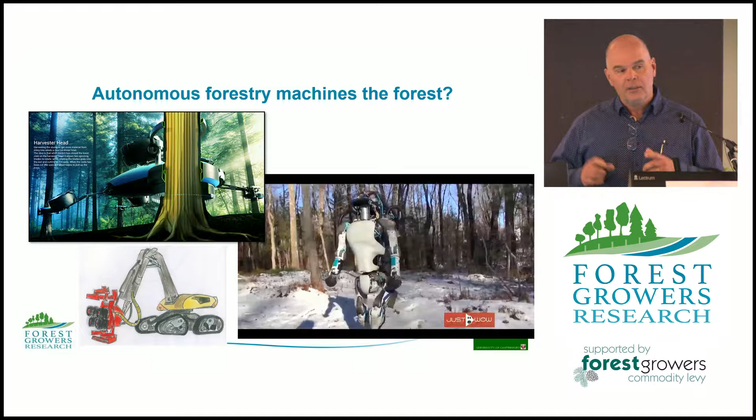You may have seen that video clip before, but why don't we have robots working in our forest industry? The forestry environment is a very difficult environment. Most robotic systems work in very managed, controlled environments such as factories. There's a lot of really cool drawings out there. You see that top left picture, a really futuristic looking harvesting machine, something that might float or drive through the forest, knocking trees over. The reality is there's a lot of low-hanging fruit out there in terms of autonomous machines, really cool ideas with robotics, but some of them are still some distance off.

Some of the examples that we do have in forestry already are semi-autonomous. Semi-autonomous refers to basically a computer controlling a whole aspect of an operation. The one I'm going to demonstrate here has been operating probably close to 15, 20 years now in Europe on their yarder systems: the whole carriage movement is being controlled by a computer, and that has some very specific advantages. First of all, the most obvious one, there's no operator, or the person who's looking after the yarder is available to do some other work.

One of the specific advantages of having a computer-controlled winch system here is that, for example, if a tree gets hung up behind a stump, we have these big spikes and tensions. It takes an operator about 1.5 to 2 seconds to respond to that. The computer can respond in 1/1000th of a second and actually stop it. We're tipping over about 1 yarder here in New Zealand every month. That's the stats on our yarder tip overs. So that's one of the ways that the technology can help us prevent these particular accidents from happening.

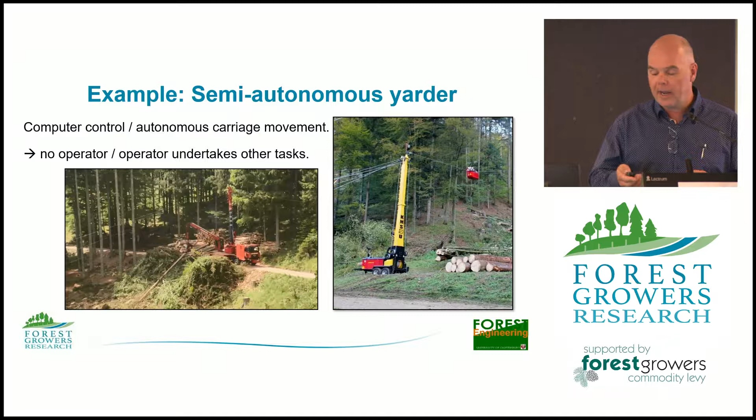The other thing that we'll see in this picture here is you can see the biomass issue highlighted by Kit in his presentation yesterday, and you can see here how some of the European systems are managing it as a separate product. They're able to store it and they will pick it up as part of their regular harvesting operation.

Here's another one that's getting a little bit closer to home. Obviously, a lot of our extraction is done by ground-based systems, our skidders and forwarders. Here is a specific system that's been designed for steep terrain. So we've got a winch assist harvester working on the slope. So that's actually being supported by a cable. And you've got this thing, and they actually call it a Pully, but it's a little buggy that simply shuttles itself up and down between the harvester and the roadside.

So it's an unmanned extraction system that's bumping up. The harvester loads it directly, then it shoots itself down and ends up at that roadside to be unloaded by an operator that then also turns around and loads the trucks.

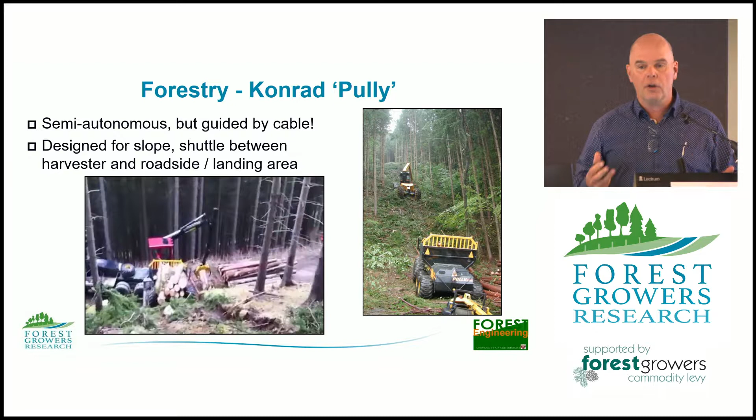So can we expand it? This one works on a rope, and the reason why it works on a rope is because in Europe it's not clearfell, they're working under canopy, so they're restricted in terms of the GPS signals that they can get, so they have to work along a rope. In New Zealand, of course, we're working in clearfell, so we can actually work more extensively with GPS.

We wouldn't be the first industry to really adopt sort of autonomous extraction systems. Both mining as well as farming are quite far advanced in adopting this technology. Here, for example, we've got a tractor drone. And it's very simple technology. It's simply your GPS unit on top, and then you may have some sensors or video cameras on the front to help for that final control.

In this case, they're harvesting grain or corn. But this machine here, this tractor here, is simply a drone. It's what they call a tractor drone. It doesn't have an operator, and it simply shuttles between the unloading area. You've got a GPS on the harvester, it knows where to go, it'll chase it down the paddock, and when it gets right next to it, it'll follow it along until it's full, and then it shoots back to the unloading area. So you can easily imagine that our skidders and forwarders would be able to do a very similar operation without an operator in it.

The exciting thing, and I should say some of this work was supported by the Forest and Wood Products Australia, and one of the reasons there is perhaps also for our manufacturing industry, is if you have a look at the tractor unit down below there, what do you see? There's no cab on it. There's really a lot of design opportunities that we can start to implement on our machines if we don't have to have a cab. The typical cab on a harvester or forwarder is $150,000. So if you build a machine without a cab, it's $150,000 cheaper. Okay, so straight away you have a real financial advantage.

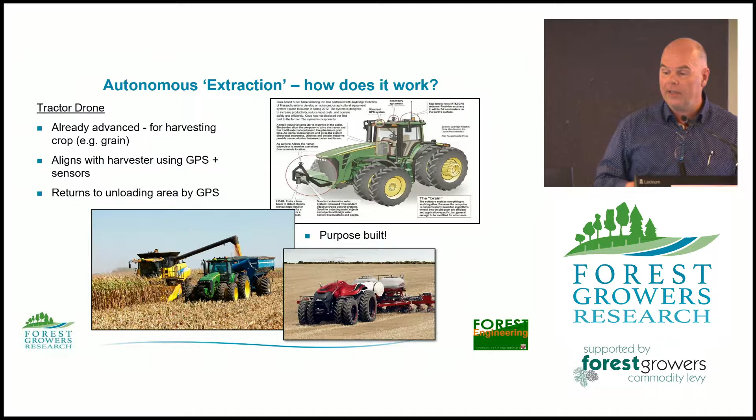We have got a little lead-off project which is co-funded by FGR as well as FWPA, and that's really starting to build a prototype. So I had a group of students here, and this is the prototype they've come up with. It's just over a metre long, but it's a little shuttle, and it's got the GPS unit on it. They've designed a control system. It's battery powered. It doesn't look great at the moment, but it is something that moves around, and at least it's a proof of concept.

So we can build them, and obviously the smarts on it, the computer technology, is the thing that we can transfer. And for us at the university, it isn't so much the machine, but look, you've got 7 young people there with engineering backgrounds.

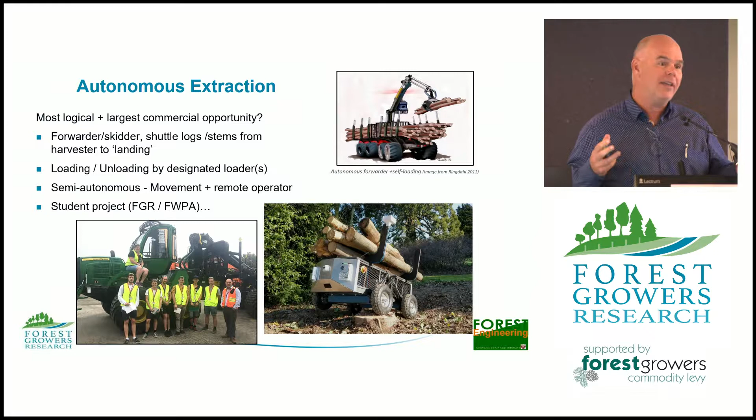They're going to be out in the industry next year, and they'll be with the people that take this to the next level. So that's the exciting thing for us. Most people get excited more about robots knocking over trees.

So where we will be able to step this up to the next level is when we can get these images and throw them in the cloud. Just like if a word pops up and you don't know what it is, you Google it. What we need is these machines to grab that image and throw it into the cloud, and it'll come back and go, that's an oil drum, don't cut that one. Okay, so that's where we want to be.

The other thing that we have with anything that has cutting systems is, of course, that risk of somebody's in the forest. What about if somebody's kid is standing in the forest and we end up chopping him or her up? That's a social aspect that we need to deal with. If people go and dress up as trees and stand in the forest when we've got these harvesting systems, of course, all bets are off. But these are the social issues that we have with harvesting systems as opposed to simply autonomous extraction systems.

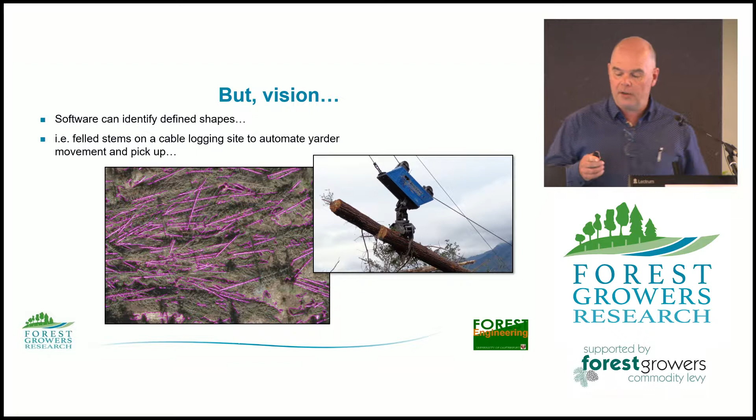Trends. We've just completed a yarder survey in 2018. I did one back in 2012. What we can see, we've got about 10% more machines operating in the country. There's a shift, as you might expect, towards the East Coast as well as to the southern North Island in terms of where our machines are going.

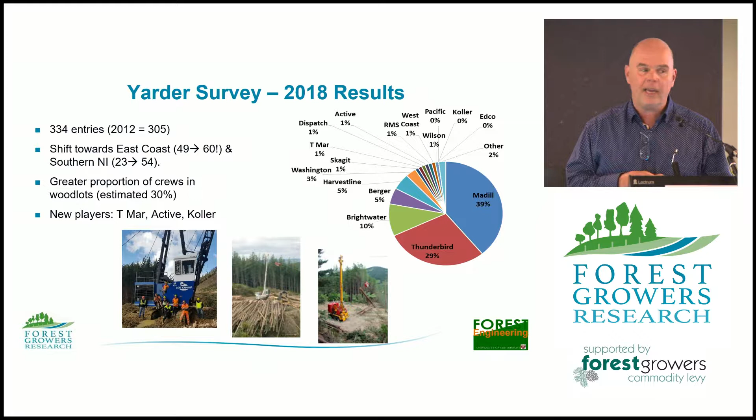What is interesting is there's a greater proportion of crews now in woodlots. About 30% of the yarders we've surveyed are working in woodlots. And there's a number of new players that have come in, the T Mars. There's one Koller, there's an active, and as of a couple of weeks ago, there's one new South African machine in there as well.

A lot of data on here, but more swingers. We're not referring to the social tendencies of the people who operate them. We're actually referring to swing yarders here. What we see is we're moving away from tower yarders, and we're basically getting more swing yarders in the system as well as more excavator yarders.

Despite the fact that everybody's complaining about fuel prices, what are we doing? We're still buying the biggest possible machine out there. So what we are finding is as we're replacing our machines, we're still buying bigger machinery. So back in 2012, TMY 70 and Madill 071, which are sort of medium-sized tower yarders, were the most common. Now we've got these big swingers, Madill 124, and of course the T Mar 650s have come in as well. They're very large machines that we're working with.

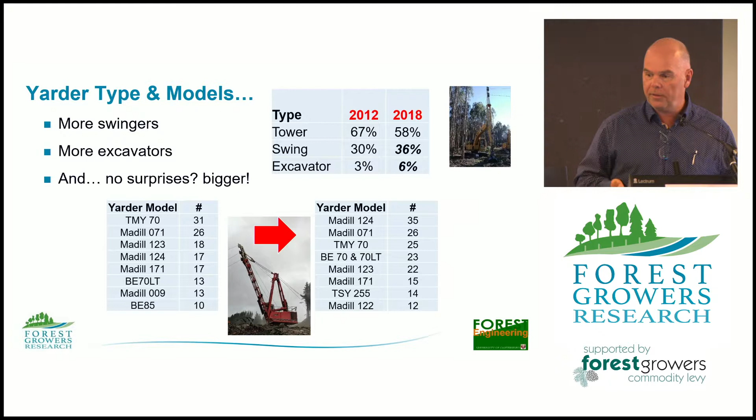In terms of our rigging configurations, and I think this is where one of the biggest jumps has been made, and compliments to the FGR program Keith Raymond leads, is that only 6 years ago, the top 4 extraction systems were all manual, all required breaker outs, choker setters, working out in the forest. We had our North Bend, scab, high lead, and now in the 2018 data, 3 of the 4 preferred rigging systems are all mechanized. Okay, grapple, carriage, or motorized carriage type system. So there's been a really, really dramatic move in our adoption of technology.

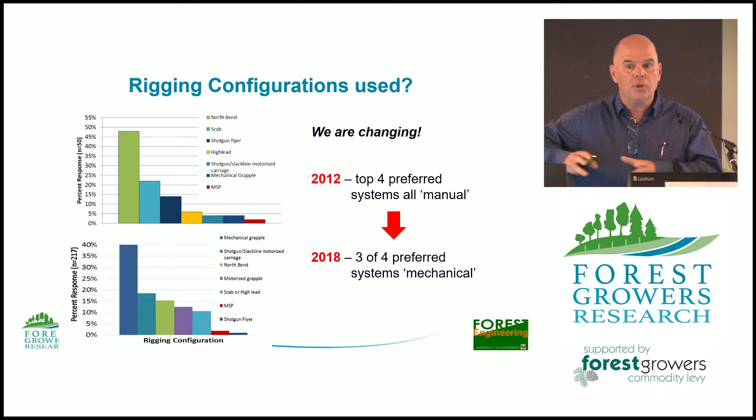Yarders are moving slowly, but what we're doing with our yarders is moving very, very quickly. We're also involved in a European Union project, so the European Union actually pays us to do some research work, which is always good, but you can see why we might be interested. In Central Europe, there's 15 different yarder manufacturers within a couple of 100 kilometres of each other, okay? So there's a lot of technology being developed, there's a lot of competition down there.

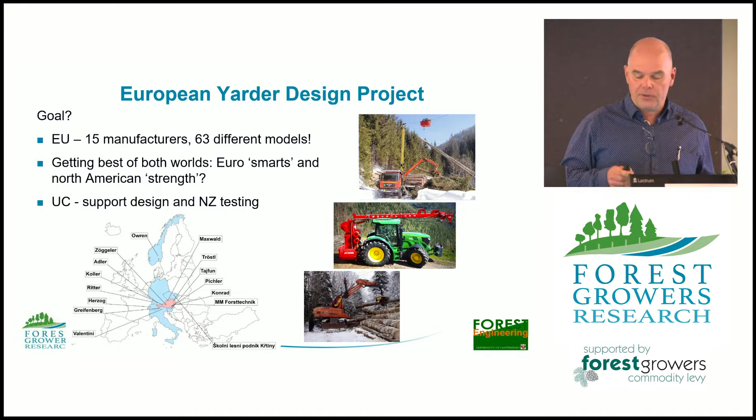Both of these systems you see are hybrids. Okay, so they're both electric winch systems, and they both run on about 5 to 6 litres per hour. Okay, the best yarder system we've got in New Zealand is around 15 to 18 litres per hour fuel consumption. So you can see a really big difference, especially with still the same power output, just a whole lot less fuel consumption. Really quite nice options for our contractors to be working with in the future.

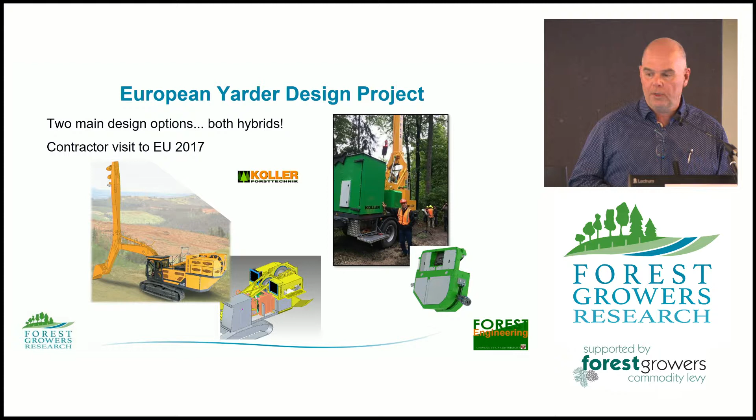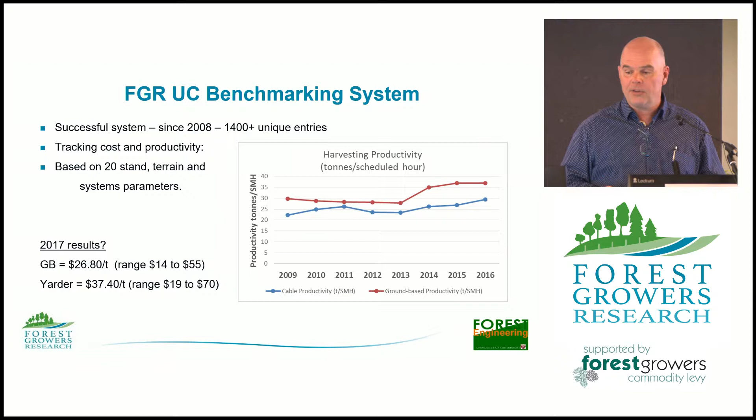Benchmarking. So we've been able to track since 2008 both costs as well as productivity. So we track costs, that's been increasing slightly. But of course, what's really nice to see is this bump in productivity that we're getting out of our systems, a slow increase on the yarders, a bit of a jump there, certainly for the ground-based systems. We've got some details around that, and one of the big reasons for the jump, of course also driven by safety, is the level of mechanization we see.

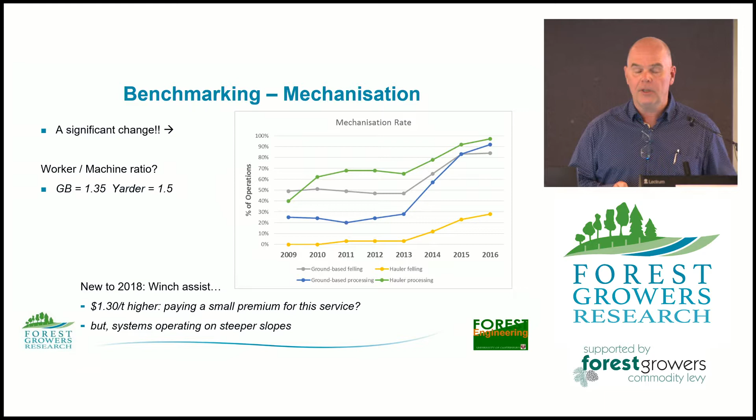Tension monitoring app. We get the opportunity to work with a number of talented students. So Hunter and I have both done a lot of work on tension monitoring, be it on cable logging systems or on winch assist systems. We use this information extensively for safety, design, testing, as well as our training workshops. But the one person who doesn't get this information is the operator of the machine themselves. Okay, they typically are looking at a single number, and maybe they've got an alarm system on, and guess what nearly all operators do with their alarm system when they've got it in their cab? Turn it off. Why? Because it goes off all the time.

Okay, and so on the one hand it's going off all the time, I should be worried about it, but they don't know what to do with that data. So what we've done, a young lady by the name of Amy, she's put our idea into an app, and that's become commercially available. So now the operators actually have a tablet where they can track their tension, and they can actually see what is happening in specific events.

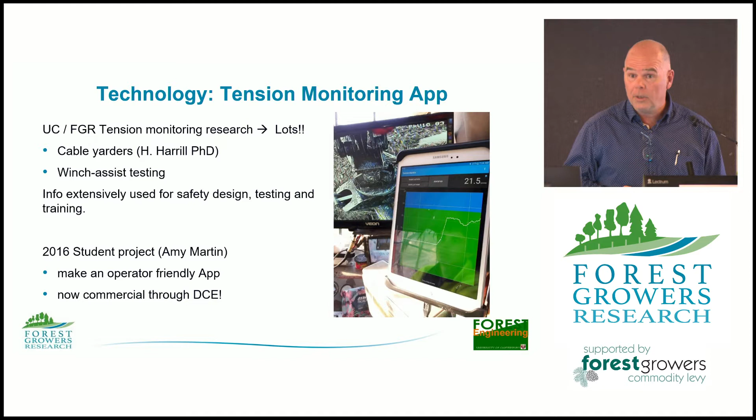Also, if you were the manager, you could jump in. So Phil Taylor could jump into one of his logging crews, hit a button, and actually see what did they do today? What did they do over the last week? How many overloading events have we had? And certainly if there's a severe overloading event, it's time to replace the rope, because that's how they break, after overloading events. Okay, thank you.

Another nice project, GPS tracking. We worry about our utilization. We can tell you, again, nice study, is that on these winch assist systems, big powerful systems becoming very popular, the average utilization of these systems is at 45%, okay? So our contractors are spending a lot of money on winch assist, but we're only using them on average 45% of the time. Okay, so it's a lot of money tied up.

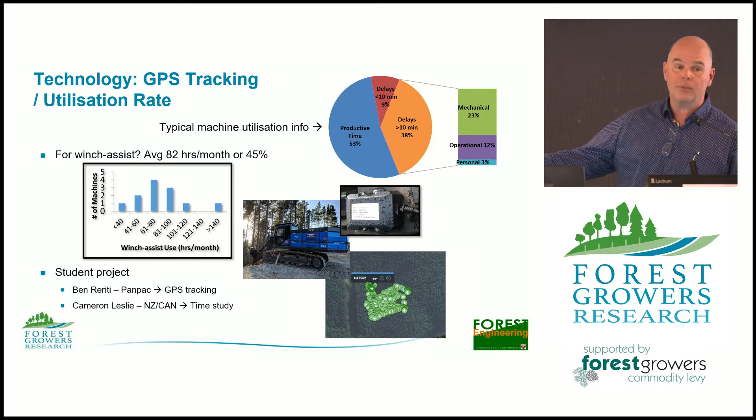So again, it's great. We've got one of our better students there, Ben Reriti, working with Panpac, getting very detailed information by putting a GPS unit on it and actually having an onboard computer that sucks up all this information. So we get a really detailed breakdown and understanding of what the actual delays are and what the reasons for the delays are. Is it broken down? Is it waiting for other machines, or is it waiting for the operator? So we get that level of detail to help improve our technology.

And then, of course, we've got the data to back it up. How long does it take to pick up logs when they've been presented in different ways? And we're able to transfer that information to an operator. And Hunter's been spending time with logging crews and basically helping operators understand the impact of load size versus cycle time, as well as understanding that tension, deflection, payload relationship.

This is the last one, Harvester Simulator project. So we've got a Harvester Simulator that was donated to us by John Deere. We've had a number of students do their research project on it. We've actually had one comparing operators with gamers, basically people who game regularly. As you can imagine, gamers are actually a lot faster than experienced operators. They just do a lot more damage to the equipment as they go along.

So some of these results are obvious, but the current FGR project, one good way to get students excited, especially male students, is to say, why don't we compare females with males? Go and find a dozen females to come in and actually work on the simulator and compare them with males and just see aptitude, attitude, because there's actually some really cool research work out of Sweden that shows that women, on average, are better operators than men. Can we replicate it? Can we understand why that is, especially around the damage component, okay?